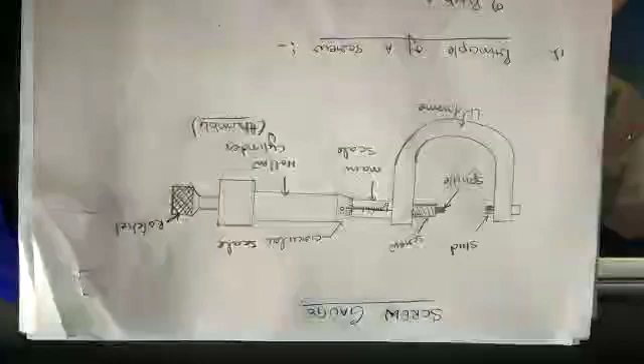Good morning everyone. Today we are going to start with our 9th class physics chapter 1, that is measurement and experimentation. As you already have done your first measurement instrument, that is vernier caliper, in your class, now we are going to start with our next instrument for measuring precise readings, that is screw gauge.

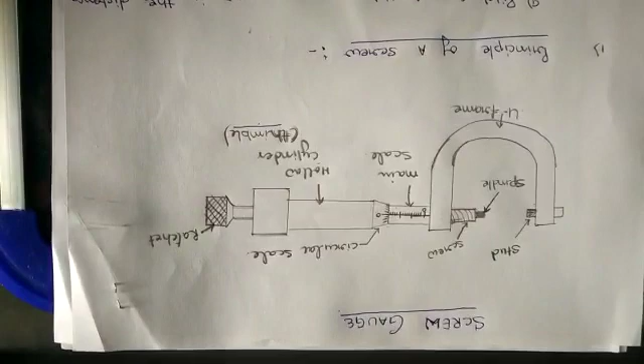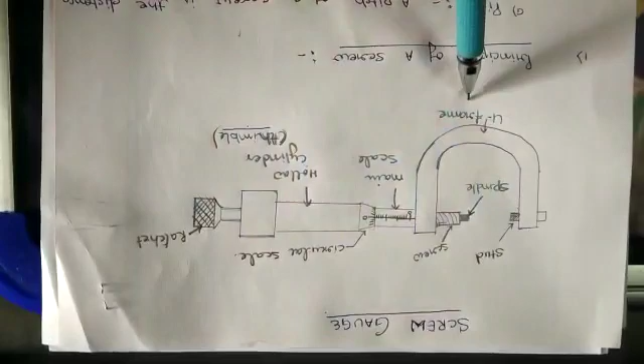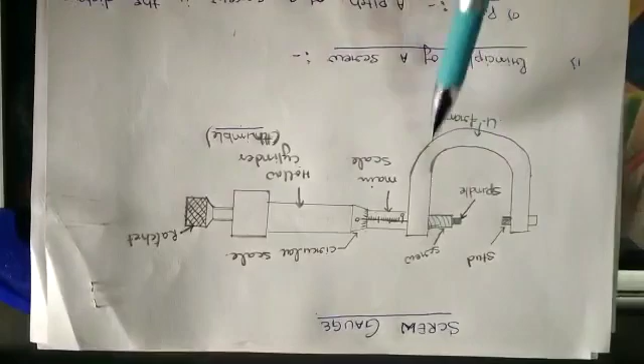First we are going to discuss its construction. In this diagram, you are able to see it. It is having the U frame, which is U shape of metal. One stud is here, which is already fixed on the U frame. The screw, which is rotatable, starts from here till the ratchet.

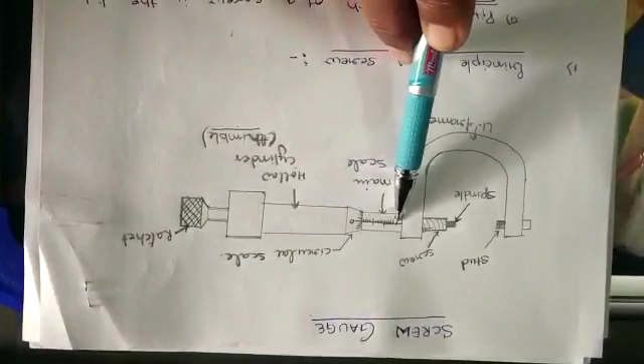It is having two scales. One is the main scale, which is horizontal. It is similar to the normal scale which you use in daily life for mathematics, calculations, or measurements.

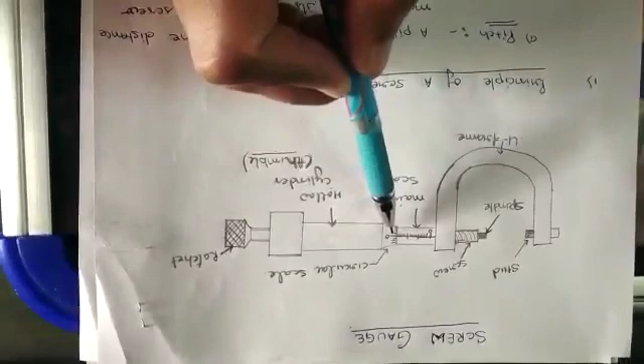Secondly, it is having a circular scale, which has the readings or values on this thimble. What is a thimble? It is a hollow cylinder on which these readings are marked. The hollow cylinder is known as thimble, and the reading on it is called the circular scale.

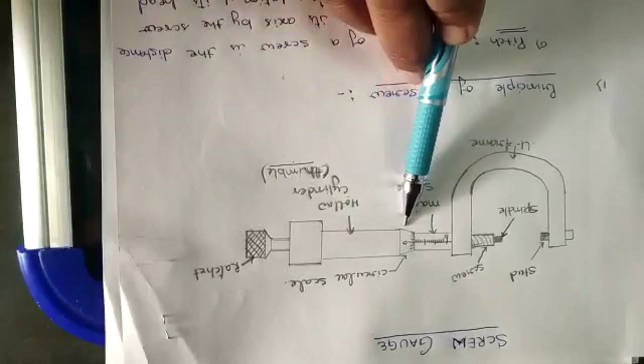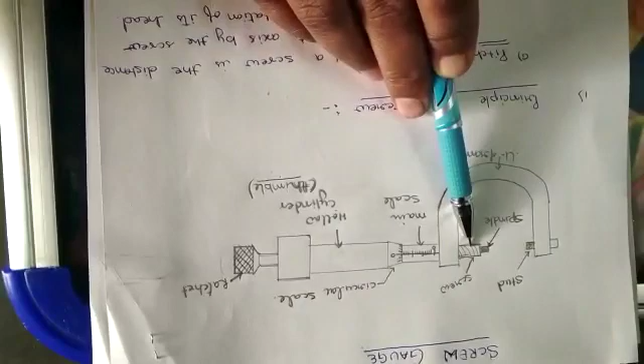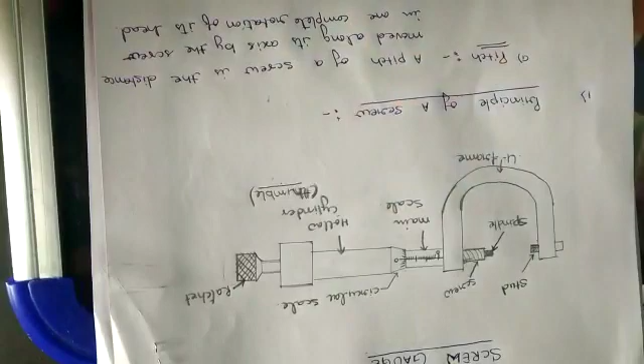It is movable. Then comes the last part, the ratchet. The ratchet is a screw or part through which we rotate the screw so that it joins with the spindle and stud. If we place any object in between, it measures the values, and we can calculate these values from the two scales, main scale and circular scale. So this is the construction.

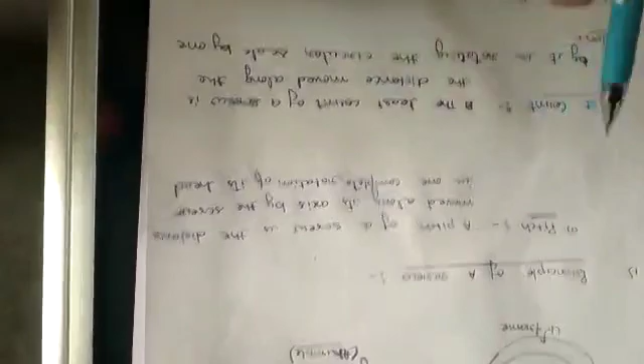Now come to its principle. What is the principle of a screw? Before discussing it, the first part is pitch.

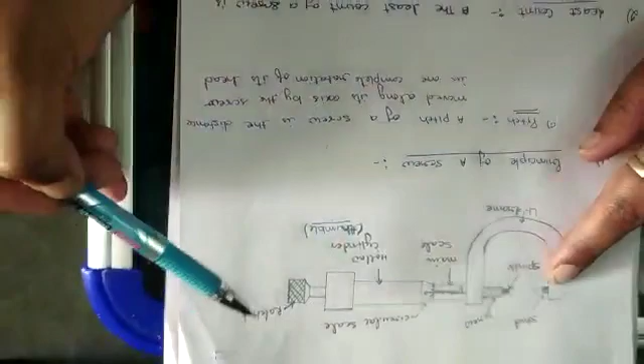What is pitch? When we are rotating this stud, suppose this circular scale is closed and this 0 is going to coincide with the main scale 0, that is the screw, spindle and stud are joined together, then the zeros are coinciding. At that moment, if we rotate this ratchet only one complete rotation, how many readings it moves on the main scale is known as pitch.

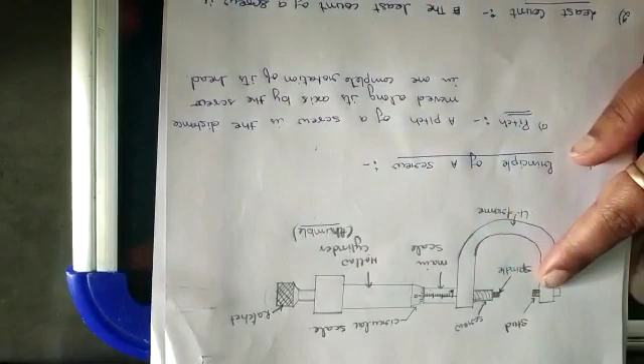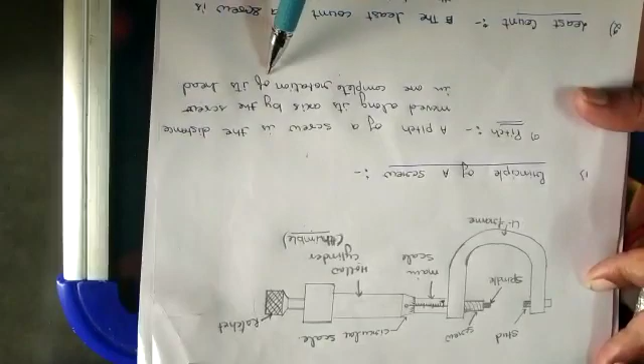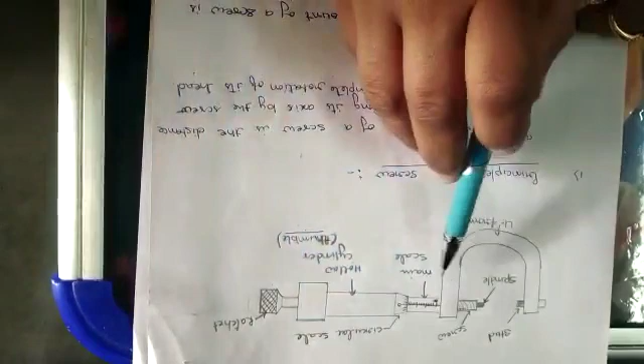So according to definition, a pitch of a screw is the distance moved along its axis by the screw in one complete rotation of its head. It means when you complete one circular rotation with the ratchet, how much the scale moves forward on the main scale is called pitch. According to definition, it is very clear.

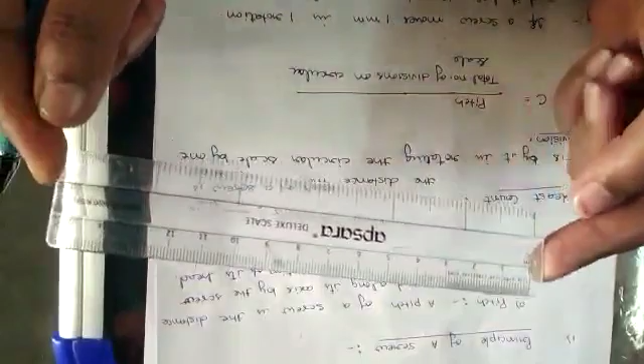Now come to least count. What is least count? Normally, if you are using your daily routine life scale, it is the main scale which is used in this screw gauge. If we want to find the least count of it...

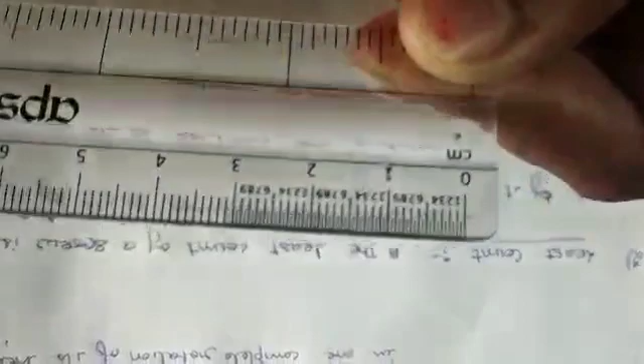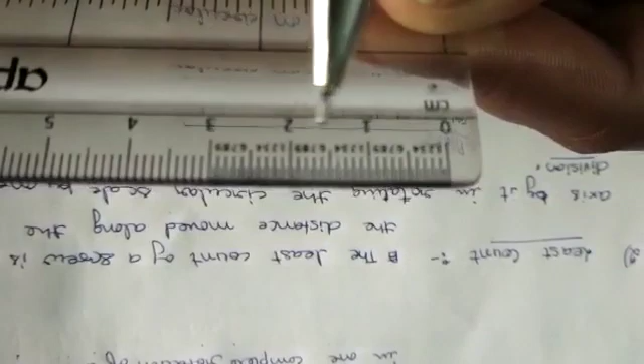You are able to see the values. First value is 0, next value is 1. So this is marked in centimeters. From first value 0 to first reading, what value you are able to find, that is its least count. Similarly, if we are able to find the value or minimum value from this screw gauge's main scale and circular scale, that is known as its least count.

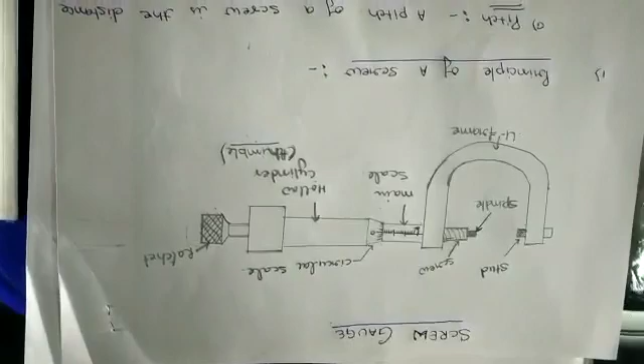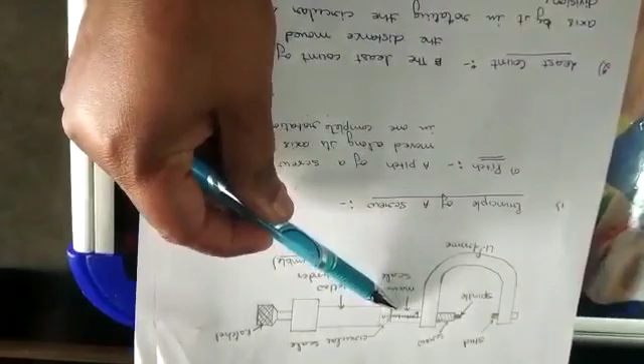So come to the definition. The least count of a screw is the distance moved along the axis by it in rotating the circular scale by one division. If we are rotating one division of this circular scale, you are able to calculate how many divisions or minimum readings, that is its least count.

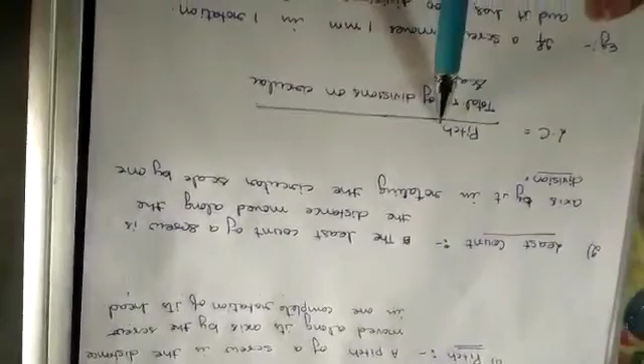So according to formula, least count is pitch. We have found it by rotating the circular scale by one division. One division means pitch over the total number of divisions on the circular scale. So let's take one example.

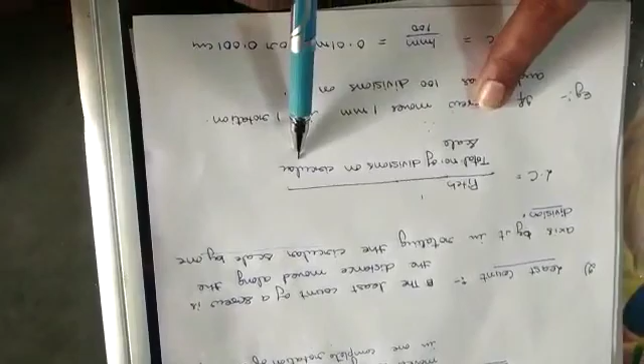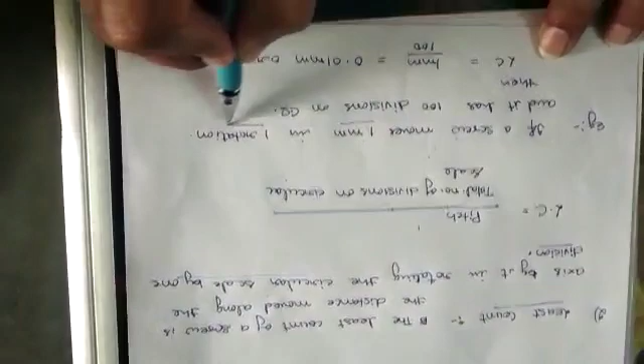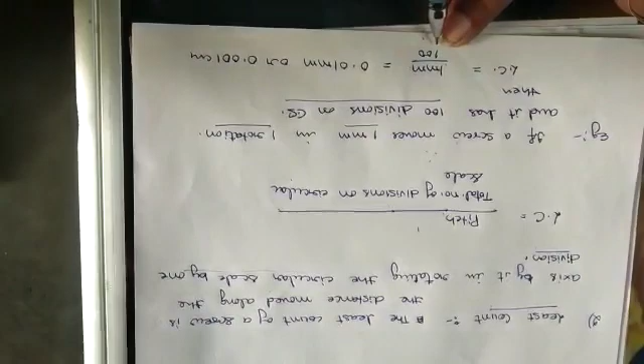If we are having one screw gauge on which its main scale is marked as 1 millimeter in one rotation, and it has 100 circular divisions, then our least count is pitch over number of divisions. Pitch is 1 millimeter, divisions are 100. So the least count of our screw gauge is 0.01 millimeter, or if you want to convert it into centimeters, it will become 0.001 centimeter. So these are the construction, least count and pitch.

Now come to the next, that is the zero errors.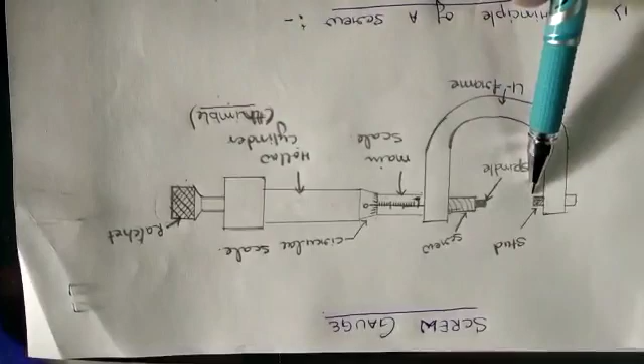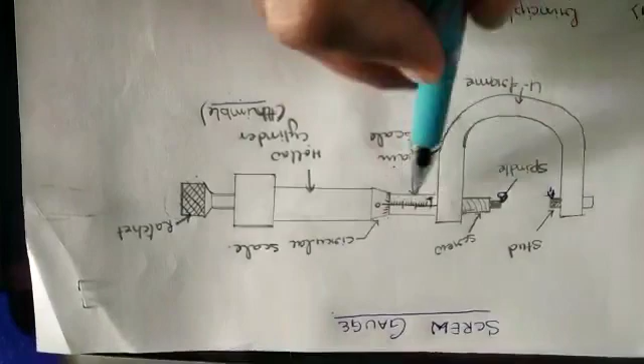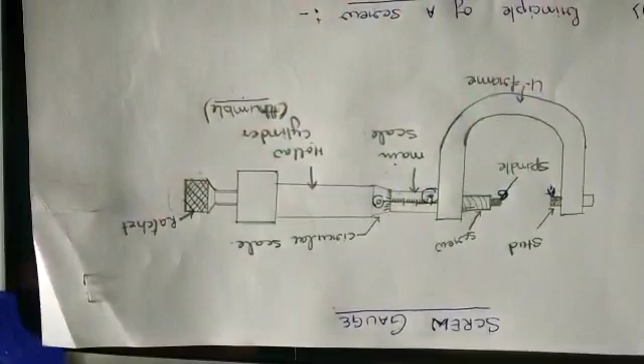Zero error is when we bring this spindle close to the stud, that is if it is A and if it is B, if we bring this B end in contact with end A, and if the zero mark of the main scale and the zero mark of the circular scale are coinciding, then this instrument has no zero error. But in case, on joining the spindle end B to A, the zero of the main scale and circular scale are not coinciding, it means our instrument is not correct. It is having some error, that is known as zero error.

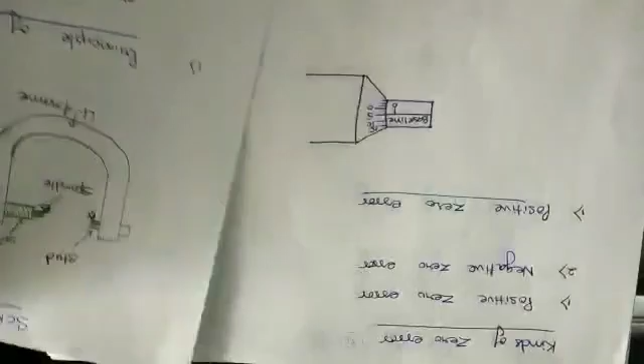Now what kind of zero errors are there? Basically there are two kinds of zero error. Number one, positive zero error. Number two, negative zero error.

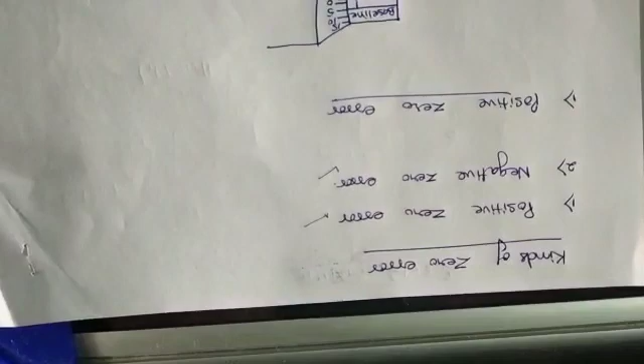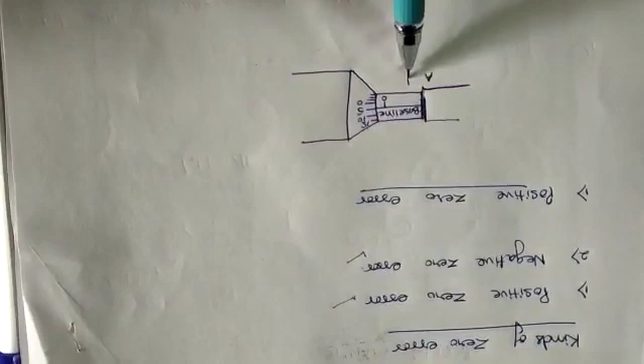What is positive zero error? On bringing the stud and spindle close to each other, or bringing end A with end B, the baseline or the main scale 0 is not coinciding with the circular scale.

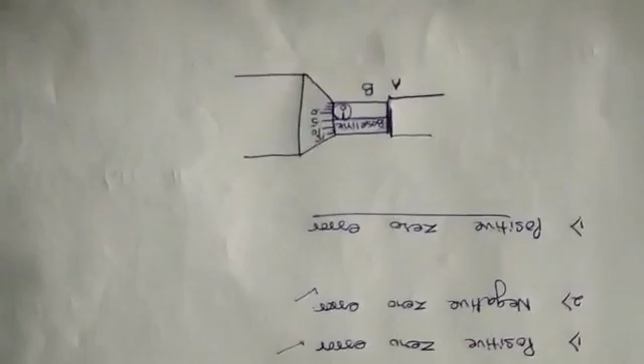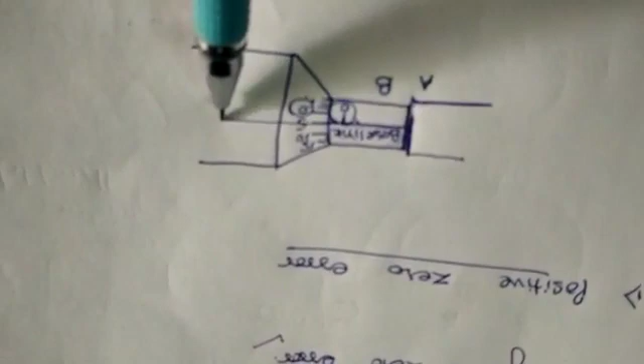This is the baseline. If the circular scale 0 is below the baseline, then we call it positive zero error.

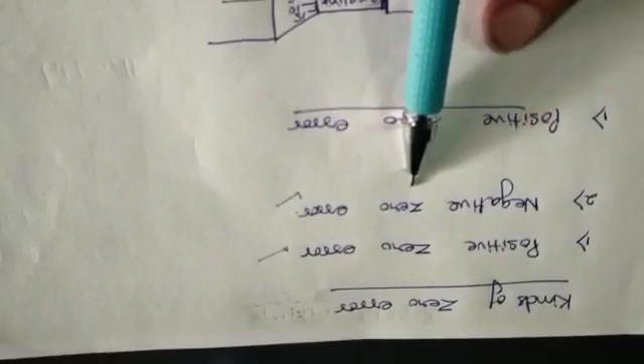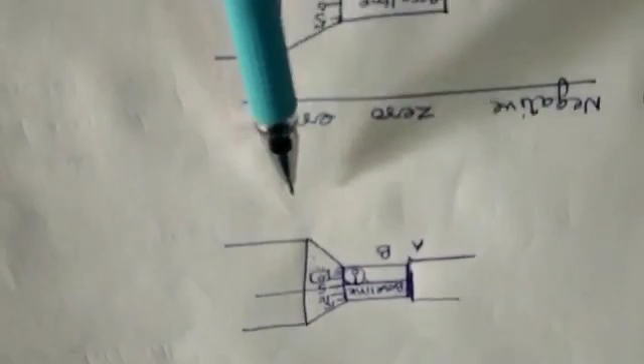Second condition: if the circular scale 0 is above the baseline, that is known as negative zero error. So we have two kinds of zero errors, one positive and one negative. Positive occurs when 0 of the circular scale is below the baseline. If it is above the baseline, then we call it negative zero error.

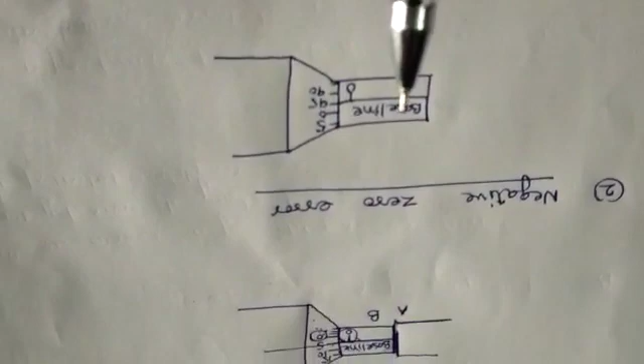So it disturbs the readings which we have already calculated with the help of the screw gauge; those readings are going to be disturbed.

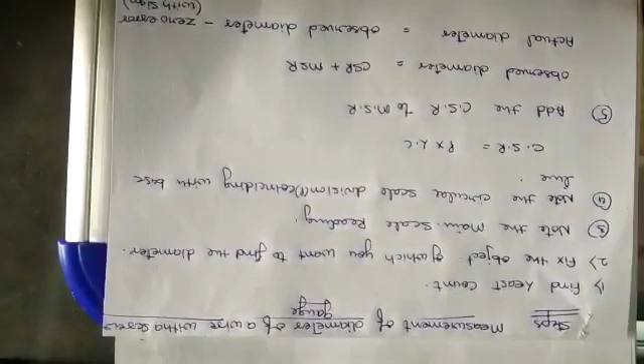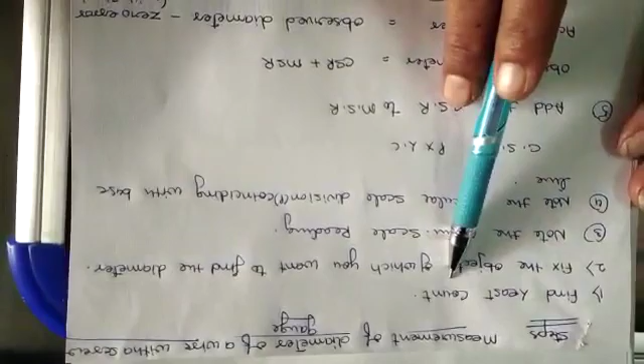Now our next topic is how to measure the value of any diameter through the screw gauge. Let's take an example of measurement of diameter of a wire with a screw gauge. The steps included in this procedure are: first, you must find the least count of the given instrument, and second, you should find the zero error.

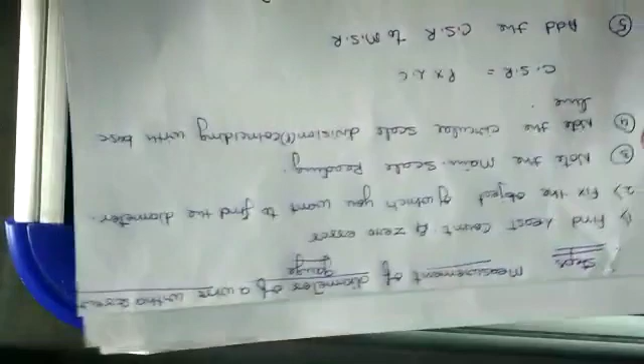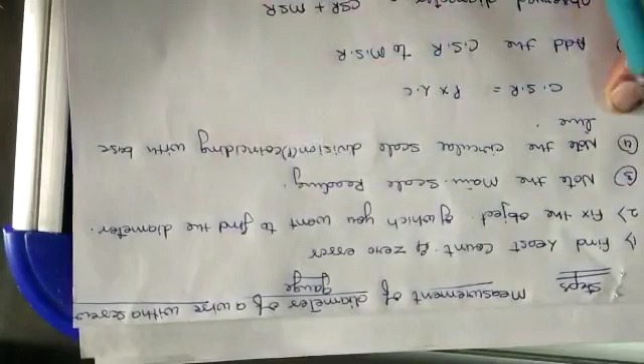After finding these two values, you must fix the object in the instrument. After fixing, you will see your circular scale has moved. Now note the main scale reading.

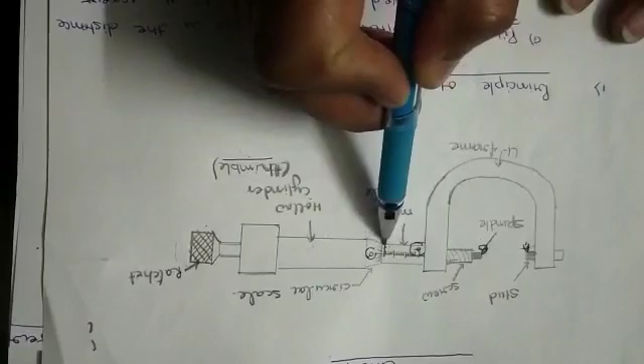For example, if you put the wire in between the spindle and the stud, you rotate this screw using the ratchet, and the reading opens up. The minimum or last value you are able to see on the main scale is the main scale reading, so note it down.

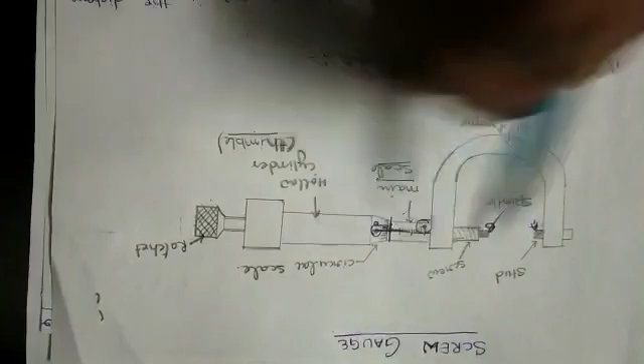Then note the circular scale division which is coinciding with the baseline. Come again to the diagram: whichever line, be it the 7th, 9th, 20th, 22nd, or any other line that coincides with the baseline, you have to note this value.

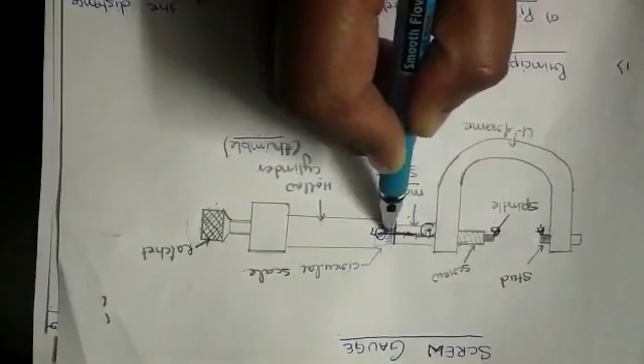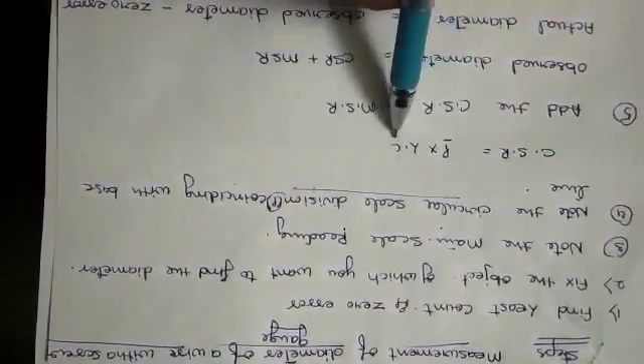After noting it, multiply this circular scale division, marked as P, with the least count. You will get the circular scale reading. So, note down the circular scale division coinciding with the baseline, multiply it with the least count, and you get the circular scale reading.

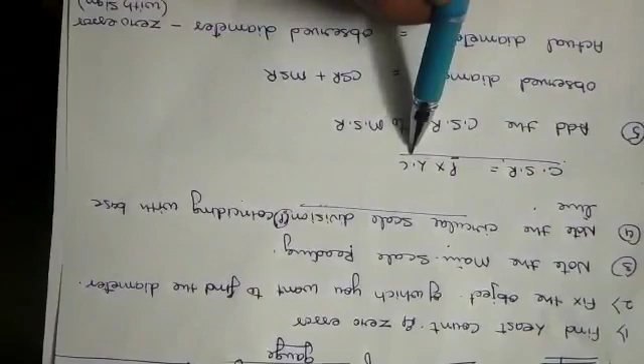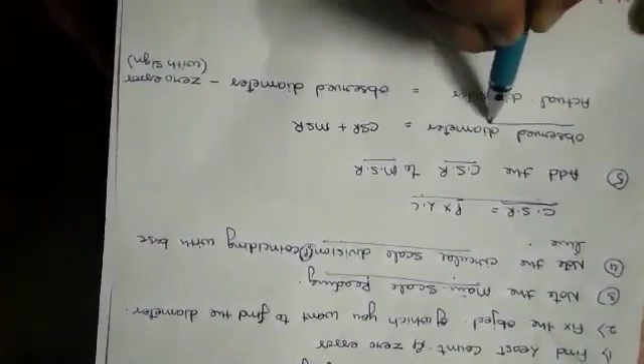Now you have two readings: one main scale reading and one circular scale reading. Add these two readings together — that is your observed diameter of the given wire.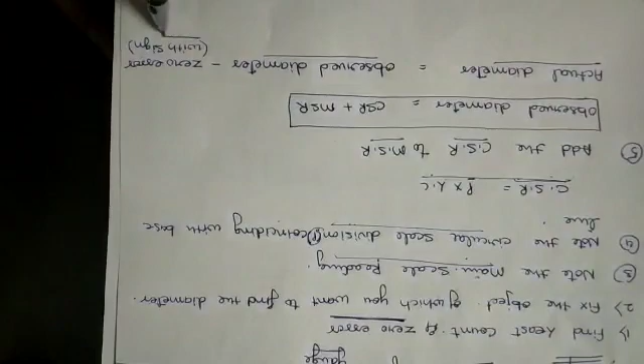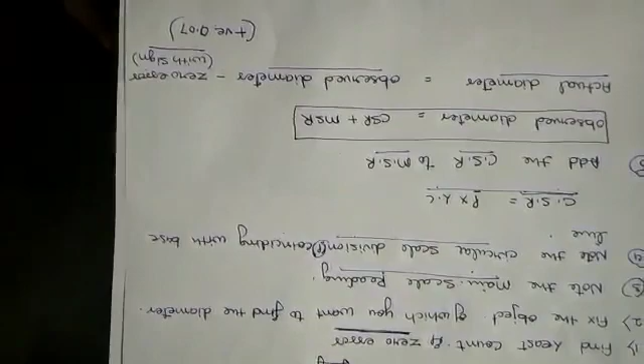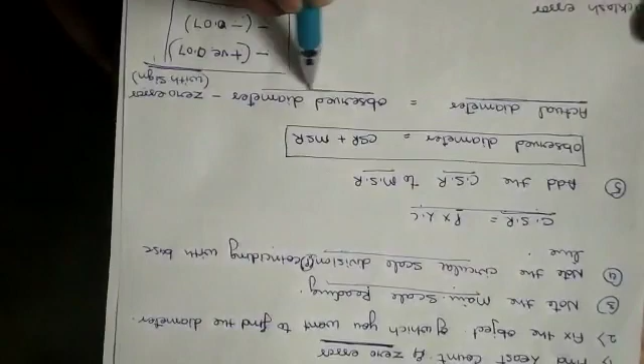But if your instrument has any zero error, which we already calculated in the beginning, then the actual diameter equals the observed diameter minus the zero error. If your zero error is positive, say positive 0.07, you write it with a minus sign. If it is negative, you put a minus with the negative value, which automatically changes sign when the bracket opens. So actual diameter equals observed diameter minus the zero error of your given instrument.

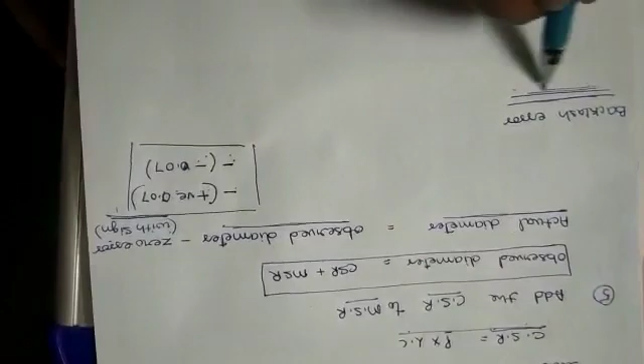Now let's come to the last topic, backlash error. What is this error? It occurs when we rotate the ratchet.

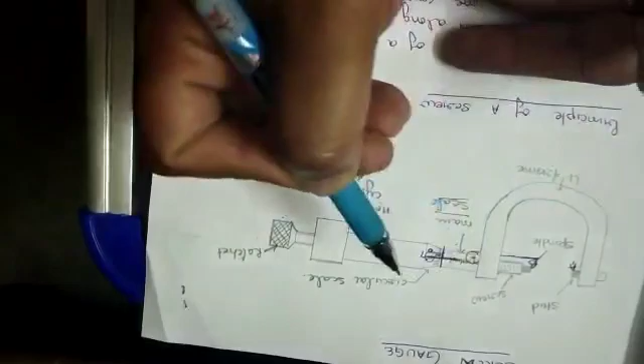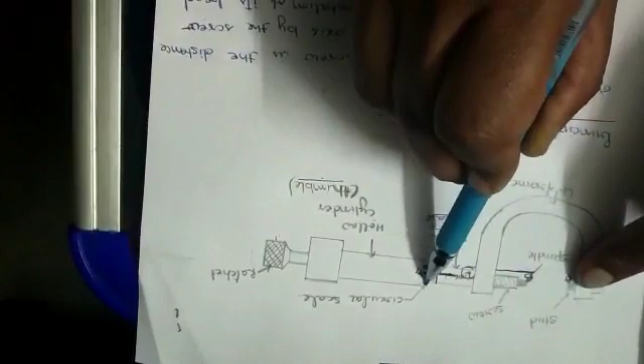Sometimes in continuous rotation of the ratchet in one direction, the ratchet rotates but the spindle does not rotate — meaning the screw is not moving forward to join with the stud. Rotating the ratchet leads to rotation of the circular scale in the forward direction, but the screw is not moving, which leads to incorrect readings on the main scale or circular scale. This is known as backlash error.

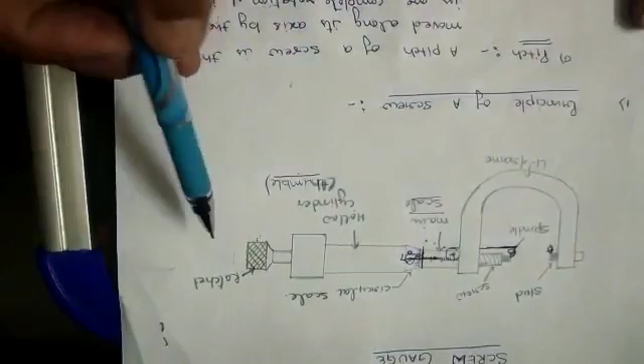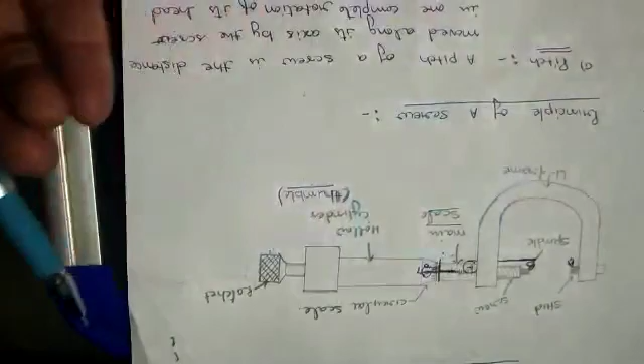So the definition is: sometimes, due to wear and tear of the thread passing through the screw, it is observed that after rotating the thimble, the readings are not moving forward, which leads to backlash error.

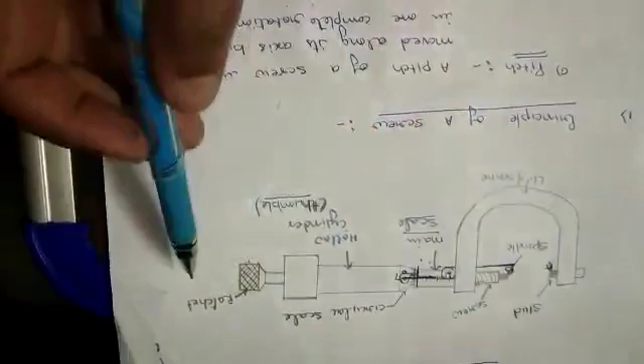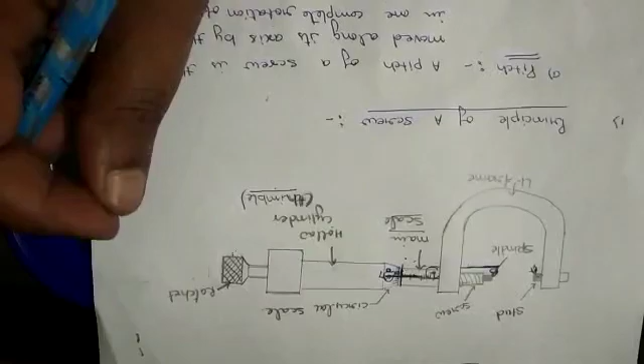How to avoid this? It occurs only when we continuously move the ratchet in one direction and then quickly turn it back in the other direction. To avoid backlash error, move the ratchet rotation in one direction; if you want to rotate it backward, wait for a few seconds, then rotate it in the opposite direction. The screw will continuously move and you can avoid this backlash error.

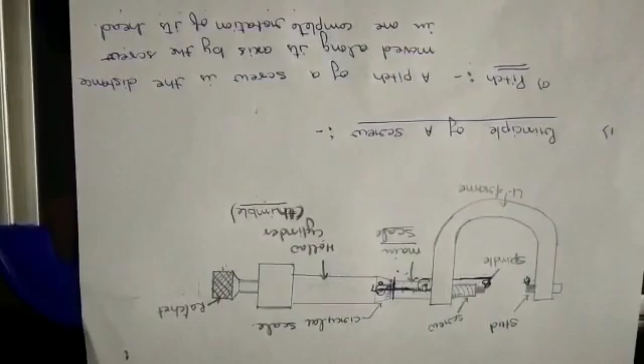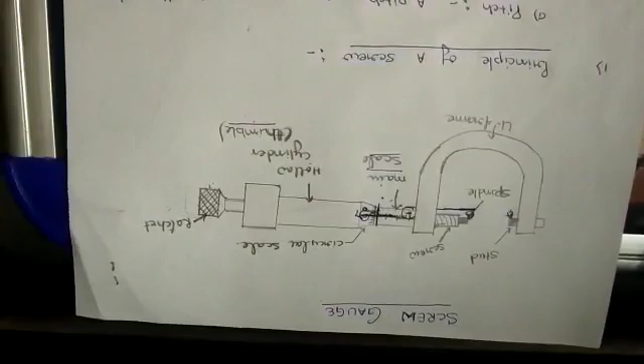So this was the last topic of the screw gauge. In this topic we studied the construction, the least count, the principle, how to measure values using the screw gauge, and finally the backlash error, which is an important question that often comes in exams. With this, we finish our topic on the screw gauge.